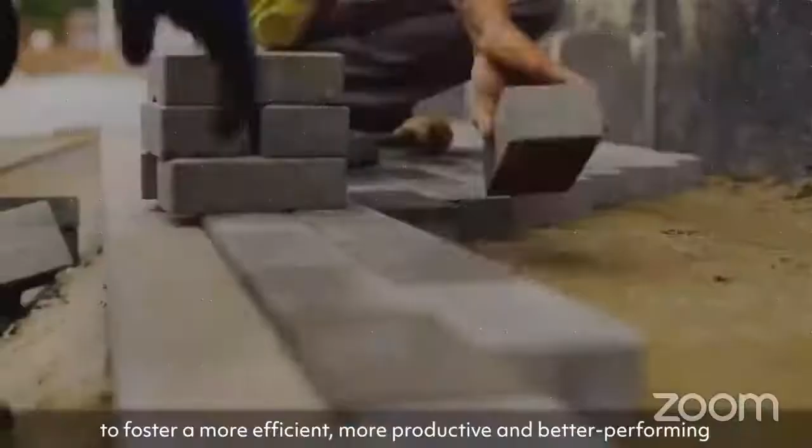Today's launch builds on an existing foundation of successful collaborations between governments and regional public sector communities around the world, which are driving better public sector decision-making through building information modelling. I am encouraged by the shared vision which has brought you here to foster a more efficient, more productive, and better performing global construction sector through increased digitisation. This is a propitious moment to speed up pursuit of that common goal.

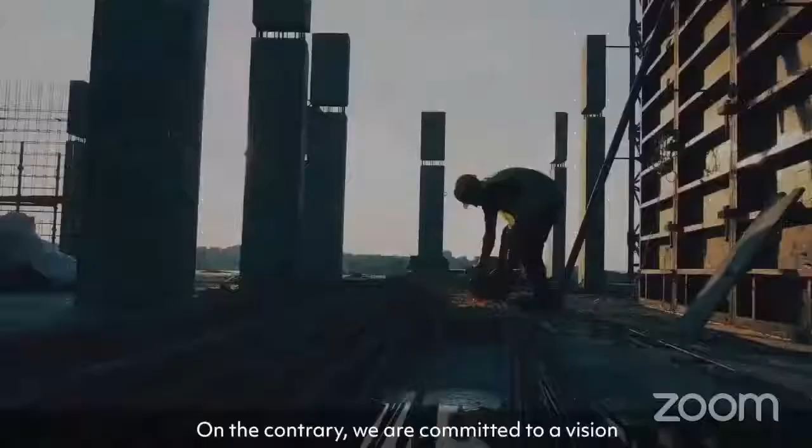As you well know, governments across the world are hard at work identifying ways to recover from the COVID-19 pandemic crisis and to rebuild national and global economies. The UK is no exception. Since the earliest days of the COVID-19 crisis, we have been clear that we would not return to the status quo in the aftermath of the pandemic. On the contrary, we are committed to a vision of building back better, greener, faster, and fairer, seizing the initiative to level up our country, create equality of opportunity, and ensure that no place is left behind. Aspirations that I know every country represented at today's summit shares, and aspirations that we cannot deliver without BIM.

As one of the truly global industries, the construction sector has a vital role to play in achieving this vision. In the UK, the sector is an economic engine, driving enormous benefits for people and places. In 2018, it had a turnover of £403 billion, accounting for 9% of the UK economy and employing 3.1 million people. That is very big, but of course it's not just the numbers that matter. The construction sector affects the lives of everyone in the UK, encompassing individual homes in remote rural areas, the densely built streets in our vast urban centres, and some of the great infrastructure projects of our generation across the country.

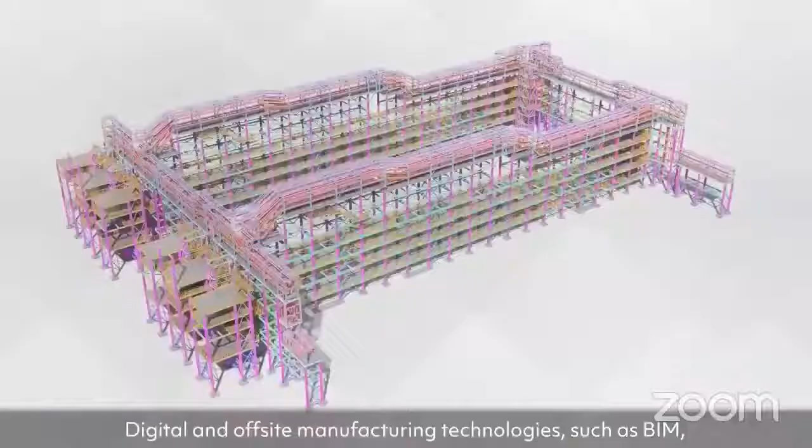The better, greener, fairer recovery that we want to see means thinking longer term and changing how we plan, design, and deliver new projects in every corner of the UK for the benefit of everyone. Digital and off-site manufacturing technologies, such as BIM, will unlock the economic forces that increase job opportunities for individuals, unleash prosperity for all communities, and enable recovery from the economic impacts of COVID-19.

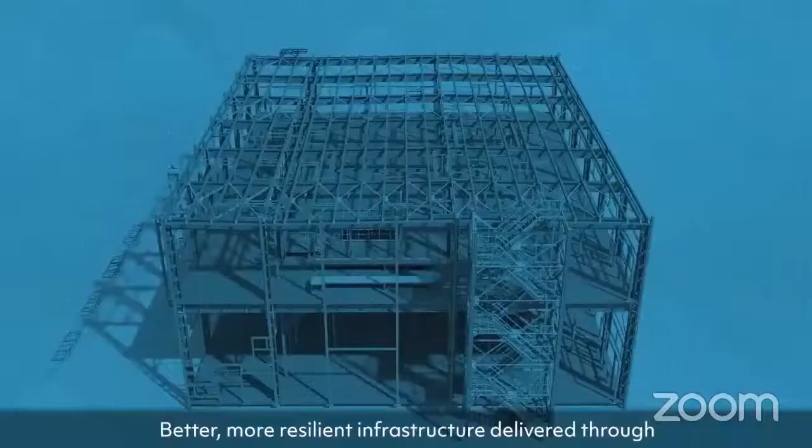Such a new approach is also vital if we are to achieve our legislative commitment to become a net zero nation by 2050. Better, more resilient infrastructure delivered through digitising construction will drive the improved performance of built assets and minimise the impacts of climate change. More efficient information management delivered through BIM will also help minimise waste, reducing the current volume of approximately 120 million tonnes a year produced by construction, demolition and excavation, accounting for nearly 60% of all UK waste.

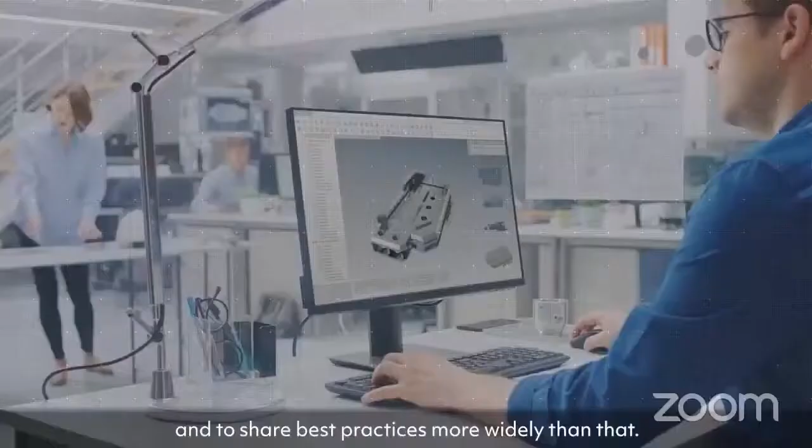Delivering this will require us to collaborate across government and industry, and to share best practices more widely. The launch of the Global BIM Network will facilitate this process, bringing together policymakers from across the globe to address the digital capability of governments in delivering infrastructure that supports COVID-19 recovery, achieves net zero ambitions, and improves prosperity for all people and places. Thank you, and I wish you an enjoyable and productive summit.

Thank you, Madam Minister. The UK has had a continued commitment and has been a terrific leader in the built environment in digital transformation, both domestically and internationally. That's really had a terrific impact on the shared goals we share around the world around climate change, social inclusion, and economic prosperity. We greatly appreciate your support and the support of the UK government.

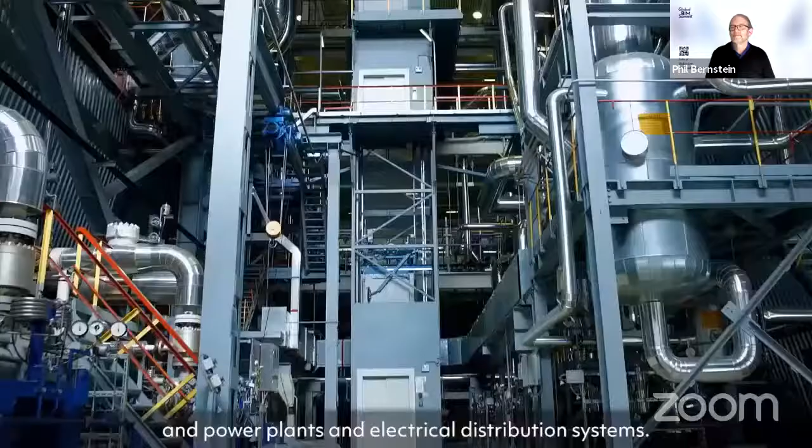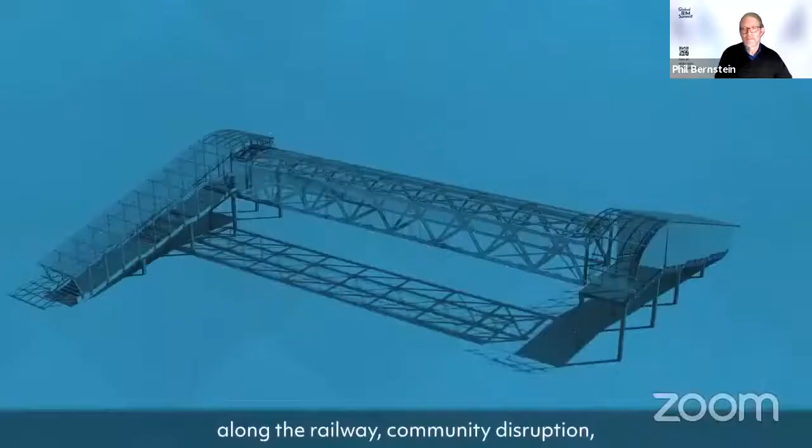ADB finances a lot of large infrastructure projects like roads, power plants, and electrical distribution systems. Many of our developing member countries don't have access to the latest and greatest tools like BIM to design and build infrastructure. Our largest investment in our history was just approved last year for a railway system connecting Clark and Manila in the Philippines. Railway systems are very complicated because you have a lot of infrastructure disruption along the railway, community disruption, and if you have a BIM model of the system before you start building it, you can actually work with the communities and plan the infrastructure disruptions more effectively and basically deliver the project more quickly and with less risk.

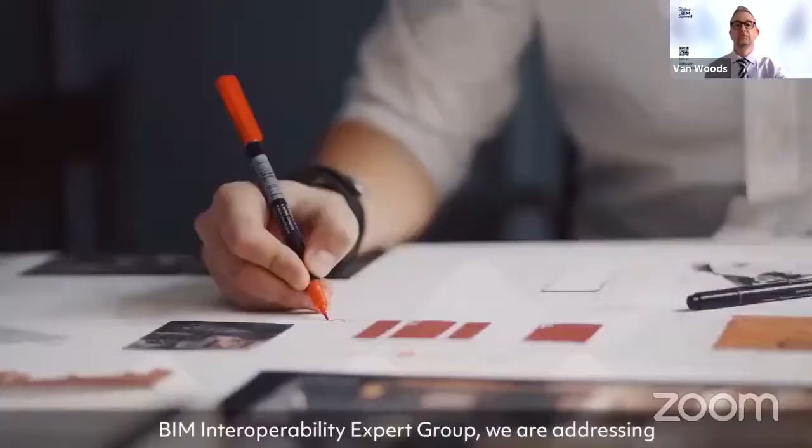At the Hub, we're developing BIM tools and guidance that can be tailored to enable organisations to achieve the level of digital maturity required to prepare their businesses for the future. Through the groundbreaking work of our BIM Interoperability Expert Group, we are addressing information interoperability to enable the whole-life beneficial outcomes of BIM to be delivered, not just for clients who own, operate and maintain assets, but for the whole construction industry.

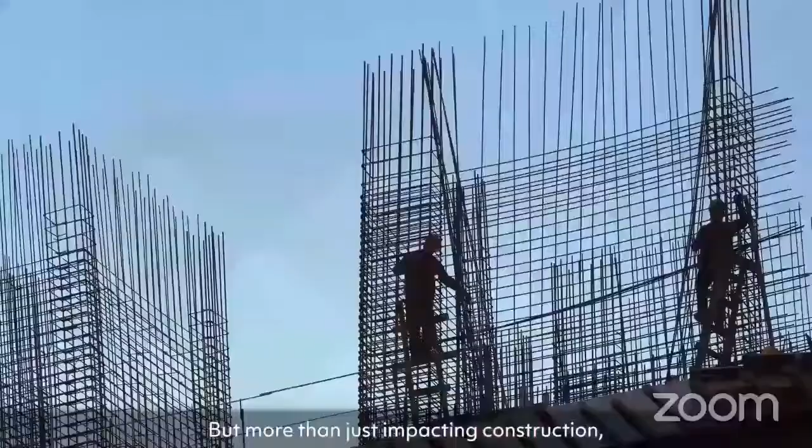Building information modeling. It's a collaborative methodology that brings together trustworthy data, technology, process, standards, and importantly, workforce skills. Since the UK government's 2011 construction strategy, BIM implementation has driven sector-wide digitisation. But more than just impacting construction, we are now beginning to unlock the opportunities for improved value of the whole life of assets.

The digital opportunity that the construction sector faces with the introduction of digital is huge. The sector itself is valued at around $10 trillion per year globally. And the estimate for savings that digital could bring to that is around $250 billion per year. That's huge.